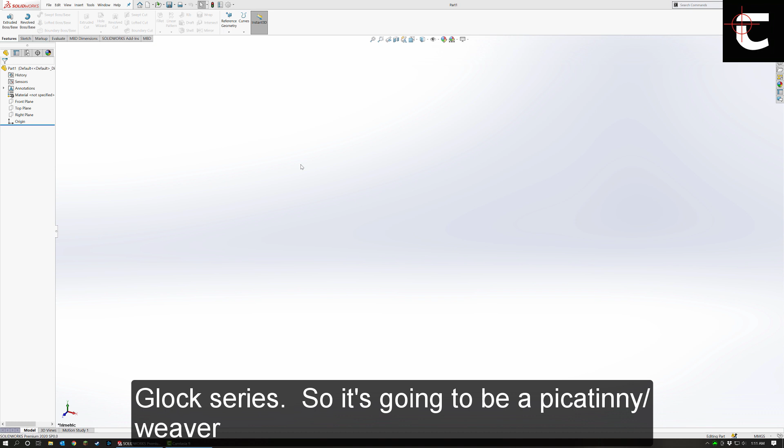Today we're going to be creating an optics mount for the Glock series. It's going to be a Picatinny/Weaver rail mount that goes onto the front of your Glock pistol, and it's going to curve around and put a Picatinny rail up top to allow you to put optics. I actually had a commission to do this for a customer who wanted a sideways racing optic. I designed that, but it didn't work out because the tolerances were not great. So I'm just going to start from scratch and show you the process of doing it.

First thing is we're going to go ahead and define our planes. I of course use SolidWorks, and the first thing I'm going to do is start the female mounting point. So I have a reference, let me pull it up here. I have a reference file for Picatinny and Weaver rails.

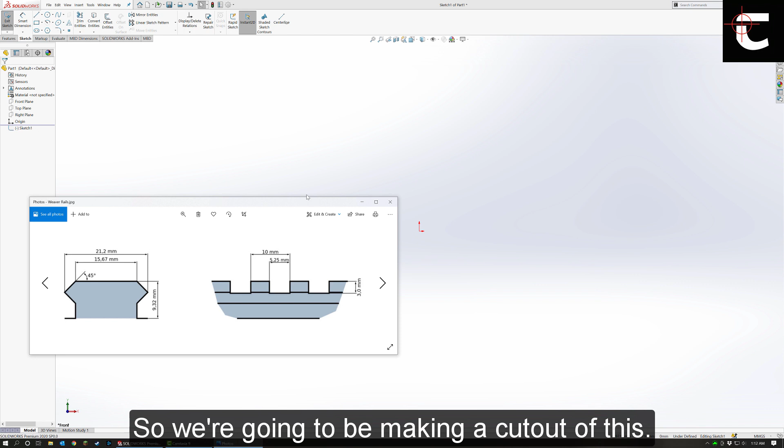We're going to be making a cutout of this that will go onto the bottom of the Glock, and we're going to tolerance it correctly. So I'm going to move this image over to my other monitor where I can get it out of the way. The first thing I'm going to do is create a rectangle to get my frame in the center.

Okay, like so. And female, so I guess first I'll draw a Picatinny rail. It'll look something like this. And of course I am using SolidWorks. Big fan of SolidWorks.

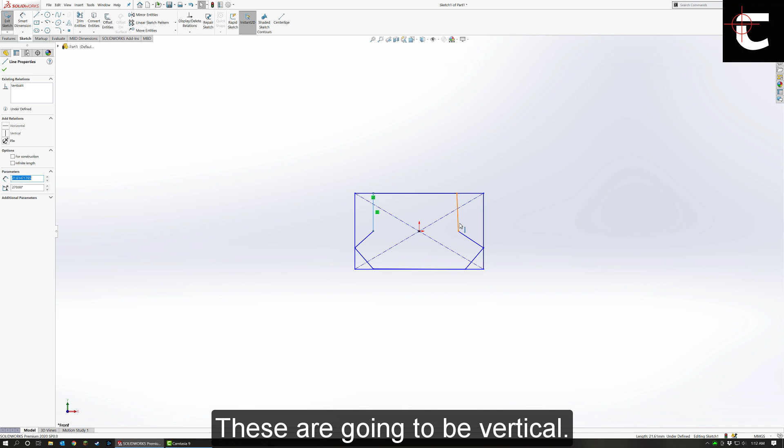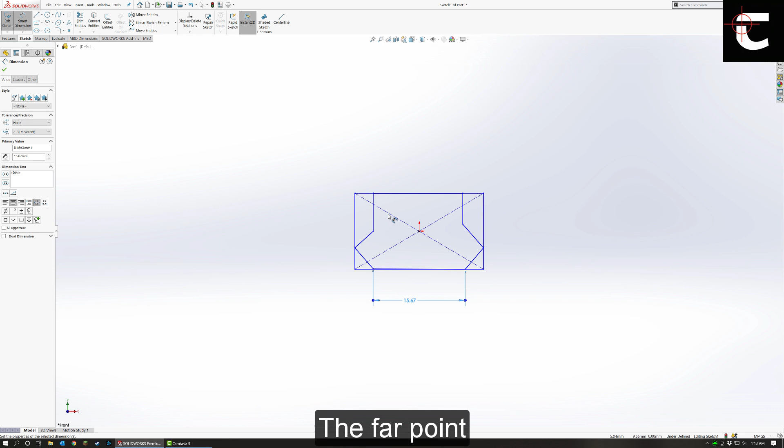These are going to be vertical. These are going to be perpendicular, I believe. Yes, perpendicular. This point to this point is 15.67 millimeters. The far point to the far point is going to be 21.2 millimeters. The height of this is going to be 9.32 millimeters.

Excellent. And this dot here, and this dot here, need to be horizontal to one another. And this needs to be perpendicular. Oop. That's because this and this need to be collinear.

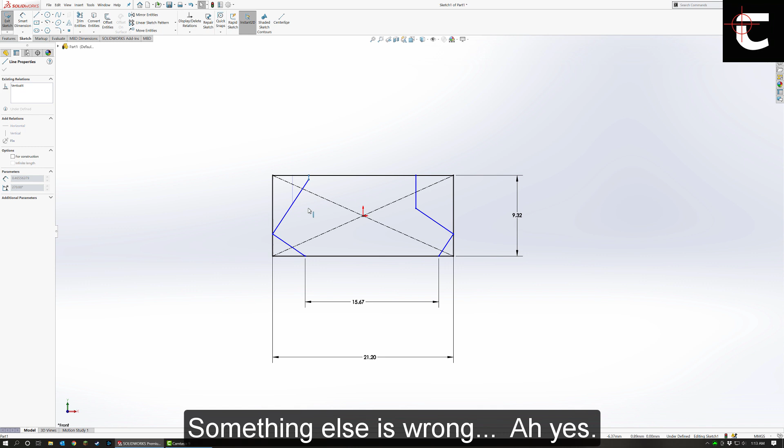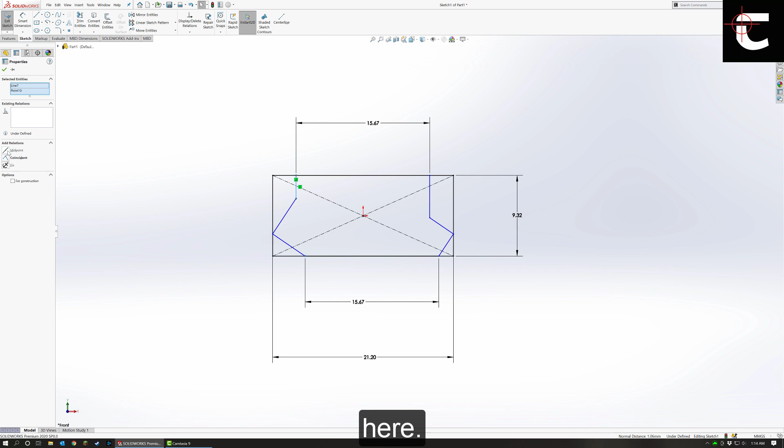Something else is wrong. Yes. This and that. These lines need to be even, and 15.67. And they also need to line up with this dot here, which is, I think, midpoint.

How do I do this here? Okay, this dot and this dot, and make them vertical. Still not right. What do I need to do? Make this and this equal. Make these horizontal. Okay, everything's locked in. There we have our Picatinny rail.

Okay, so our mount is going to be the opposite of this. So I'm going to highlight all of these, and I'm going to say they are for construction. Alright.

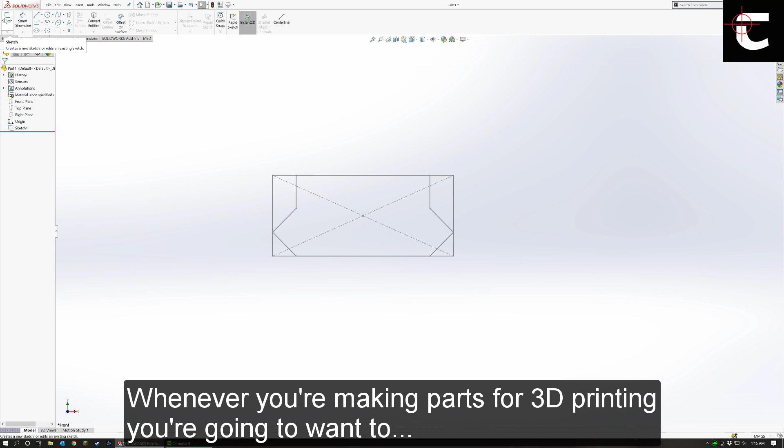So whenever you are making parts for 3D printing, you're going to want to... now, does that look right? Something looks wrong here. I think something is still off. I'm not sure if that's 100% correct. Everything's black, so we'll just run with it.

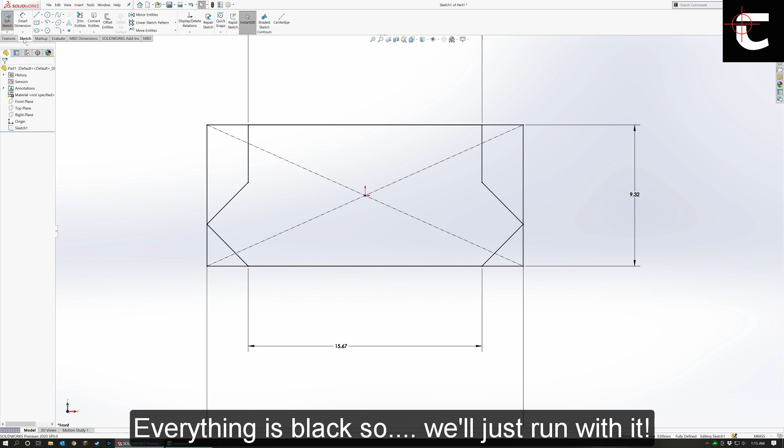Okay, so whenever you're creating parts for 3D printing, what you're going to want to do is give yourself some nice tolerances. So it's going to look like the shape that we have, but it's going to have some space on the outside of it, which will allow it to fit, because if it's the exact same size, it's never going to fit.

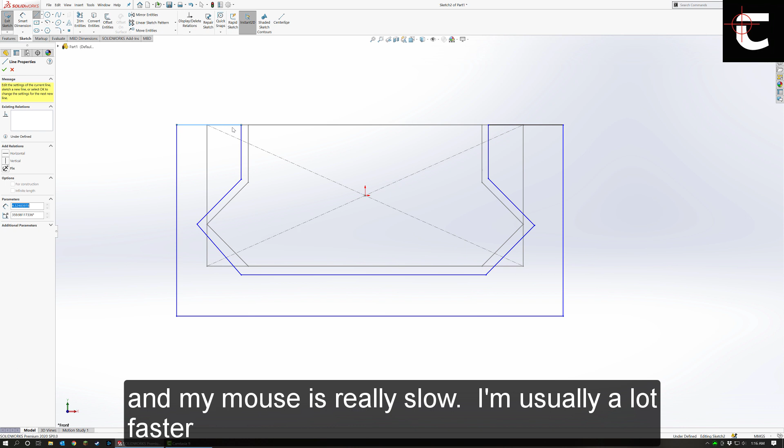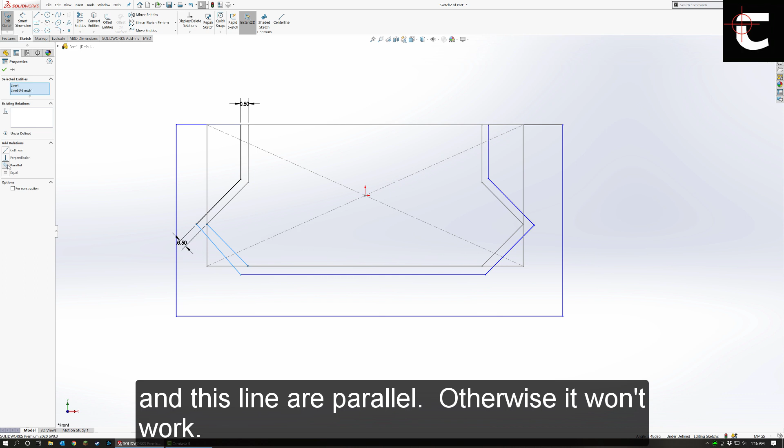So it will look something like... my mouse is really slow. I'm usually a lot faster, but because I'm using this recording software, it's slowing me down quite a bit here. So I'm going to leave a half millimeter space on all the dimensions, and we got to make sure that this line and this line are parallel, otherwise it won't work. And half a millimeter is usually pretty good for a

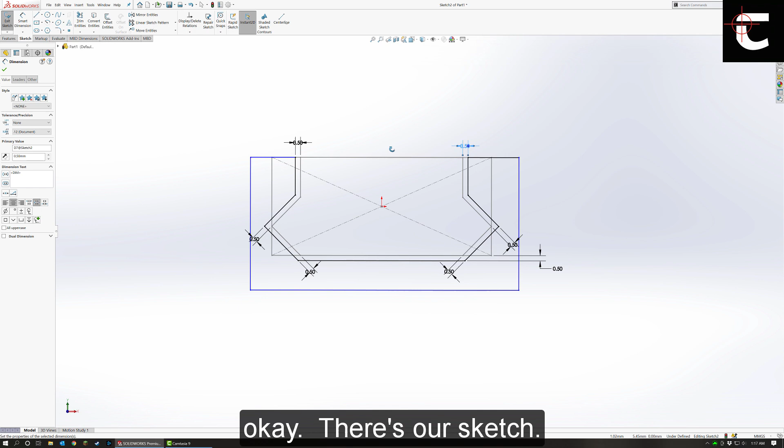nice easy slide-on fit. Picatinny rails need to be tight, but they don't need to be too tight, because you have a pin that you can put in there and screw it together and make it squeeze the Picatinny rail to make it stronger, and we're gonna go over all that. So making sure all our... okay, there's our sketch. Perfect.

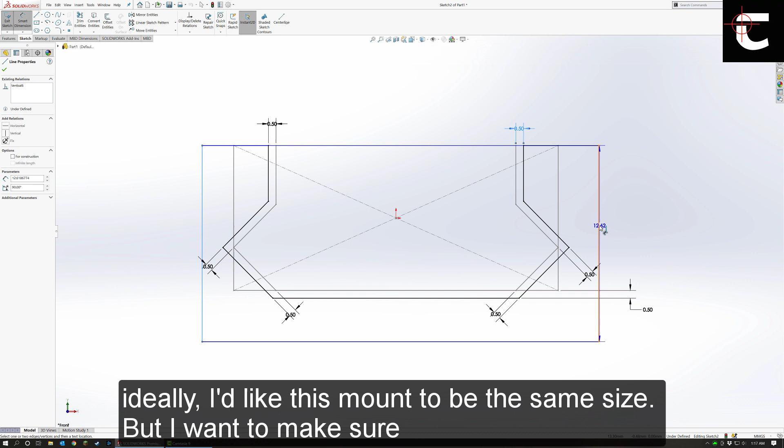Now, how wide do we want it? I have, you can't see it, but in front of me I have my airsoft Glock, and I'm going to be taking some measurements. So my slide is 25.35 millimeters thick, and ideally I'd like this mount to be the same size, but I want to make sure that if I make it 25.35, that we're going to have enough room to make sure the 3D print is strong, because if it's ever too thin, things will break, especially since we're going to be mounting optics on this. We're going to want this really strong. So I'm going to draw a line down the middle here, and that'll allow me to make sure everything's centered.

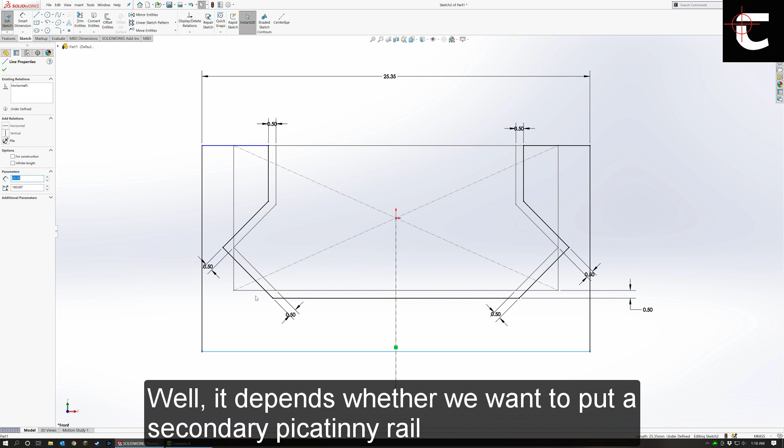Symmetric. Excellent. Now, how far do we want this to go? That is the question. Well, it depends on whether or not we want to put a secondary Picatinny rail for those of you guys that like to run flashlights. And you know what? I think we do, because I think that would be really cool looking. So let's go ahead and give ourselves maybe a good 5 millimeters of clearance, so it's nice and strong.

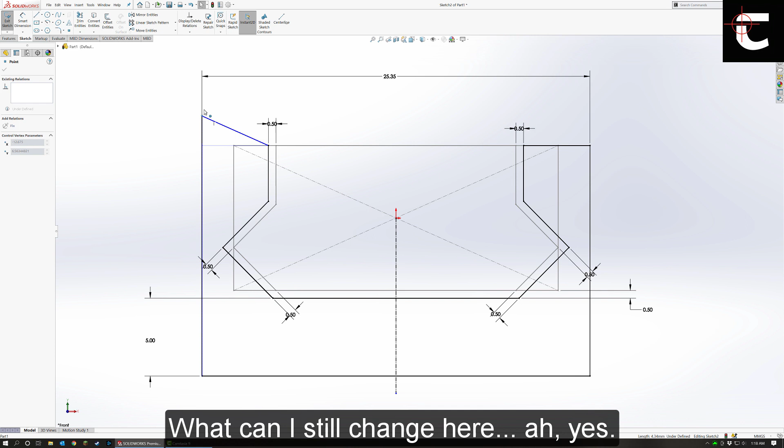This is still blue. Why? What can I still change here? Yes, this line needs to be horizontal. So in SolidWorks, if you have anything that's blue, it just means it's not knocked down, not locked down. It's not necessarily bad. It just means that things are not locked down.

So we're going to go ahead and extrude our boss, and the front of my Glock is, or the rail of my Glock at least, is about 40 millimeters. So I'm going to make this 40 millimeters long. Okay, and that's the little piece that's going to go on the front of your Glock.

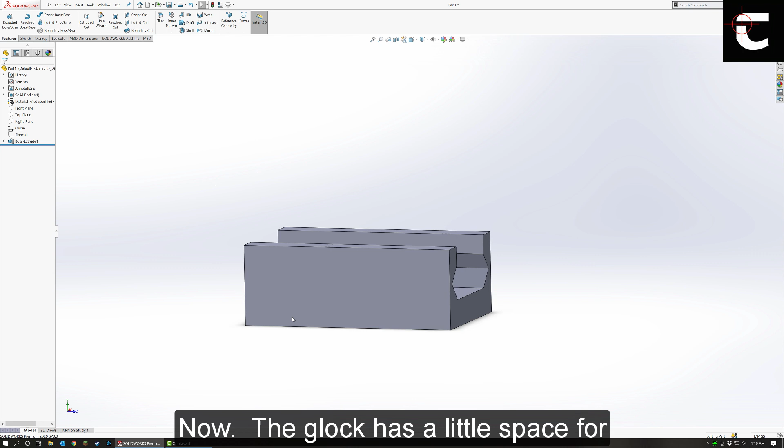Now, the Glock has a little space for a pin, and then that space is going to be about 4 millimeters thick, and it comes in at about 20 millimeters in. So we're going to go ahead and cut that now, just because we have it ready.

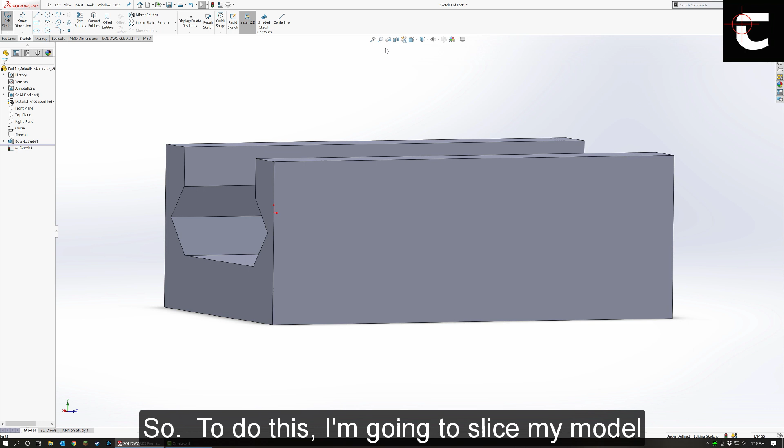So to do this, I'm going to slice my model in half, so I see what's what. I'm going to put it right in the middle of that rail. So I'm going to put it right in the middle of this rail right here.

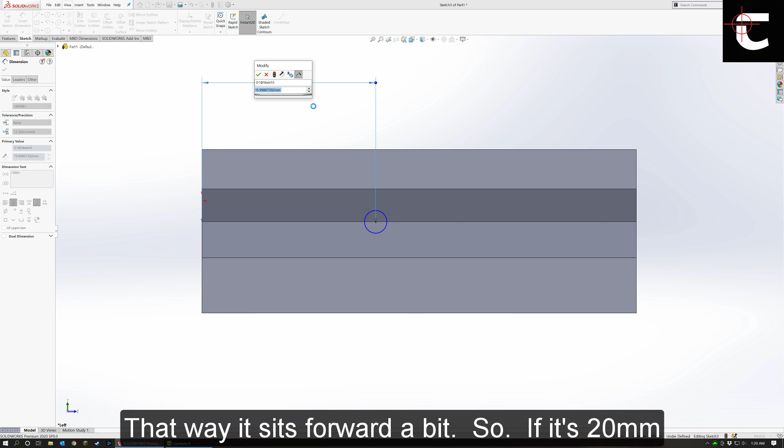I forgot, how long is it? It's about 20 millimeters in. And this doesn't need to be exact, because it'll allow your rail to kind of be adjusted as you do it. Actually, if I make it 15, it'll have to sit lower, so I'm going to want to make it a little larger. That way it sits forward a little bit. So if it's 20, I'm going to make it 22 millimeters.

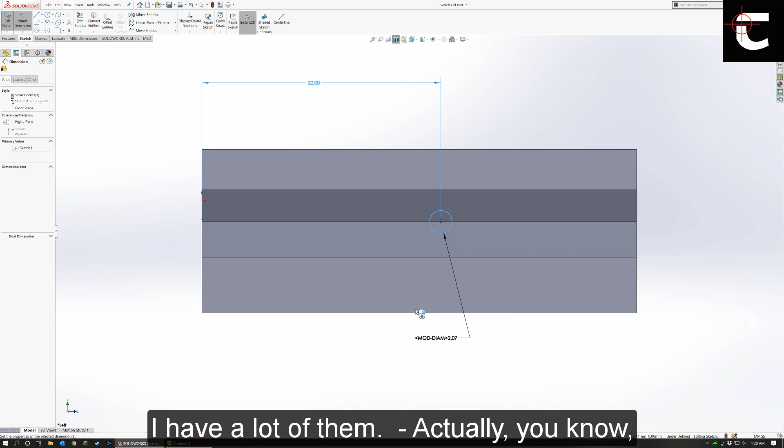And the space is roughly a 4mm hole. Now I like using M2.5 screws simply because I have a lot of them. So, well, you know, I don't know. Actually, let's just go bigger, just for kicks. So if it's got a 4mm hole, I'll cut a 3.5mm hole in my rail, and then you can put a 3.5mm metric screw and nut over there.

So we're going to go ahead and cut this, and then if we take a look at that, that's where our little screw is going to go. I'm going to go ahead and cut down a recess for our screw to sit.

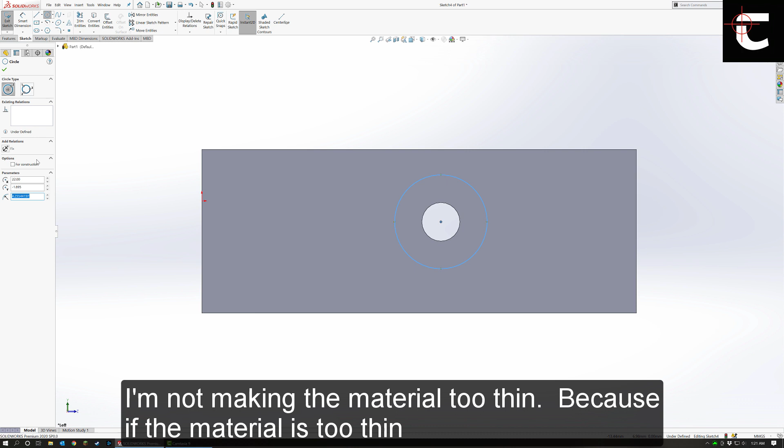Now, I need to make sure that when I cut this recess, that I'm not making the material too thin, because if I make it too thin, this rail is going to break. So we'll make this 6. That should be big enough. And this recess is going to be for the head of the screw to sit in. So if I make it 2mm deep, oof, that's, yeah, we need more meat on our thing.

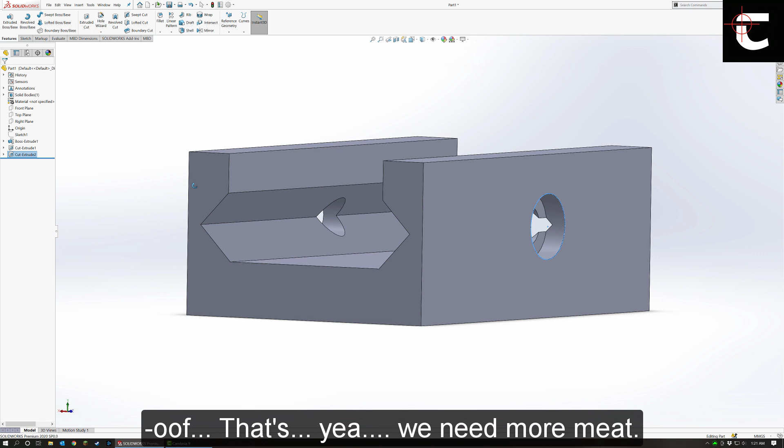So I cut in 2mm and already I'm cutting through the other side. So even though our Glock slide width is this, we're going to have to make it a little thicker. So no matter, go back here, edit the sketch. We can put another, let's say, 2mm on each side. So go from 25 to 27. Let's see how that looks.

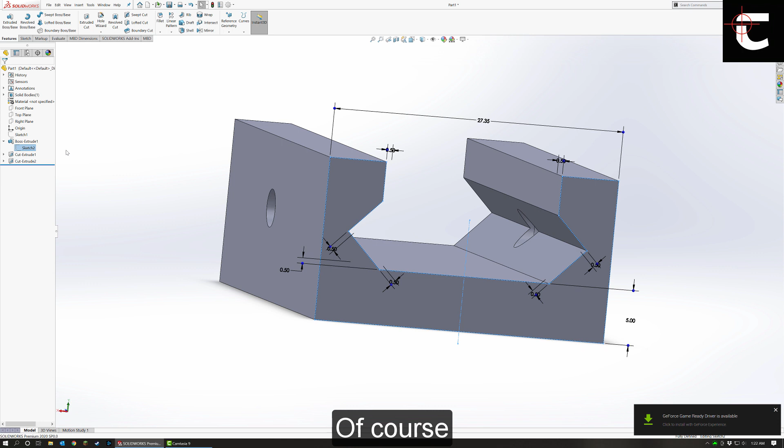Ooh, cutting it close. Cutting it real close. Let's give it a little more meat. Of course, the cool thing with 3D printing is you can always change it and reprint it, but it doesn't cost you very much. All you lose is time.

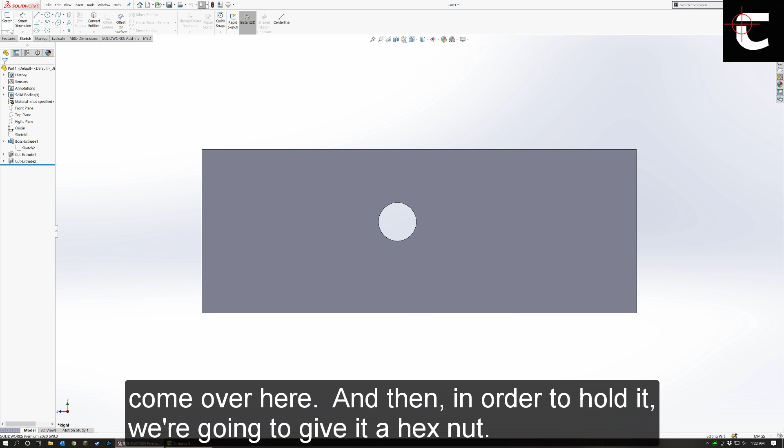But okay, so we got our recess cut on one side. You're going to stick in a 3mm screw on that side. It's going to come out over here, and then in order to hold it, we're going to give it a hex nut. Now, I don't know the dimensions of a 3mm nut, and normally I would look this up, but because I'm doing this on video, I'm just going to cut it first and then go and get dimensions later. But for M3, I'm just going to assume it's 7mm.

I'm going to cut this too deep. Okay, cool. So you're going to stick your little nut in here, you're going to stick a screw through there, and then you're going to tighten it, and it should hopefully be tight.

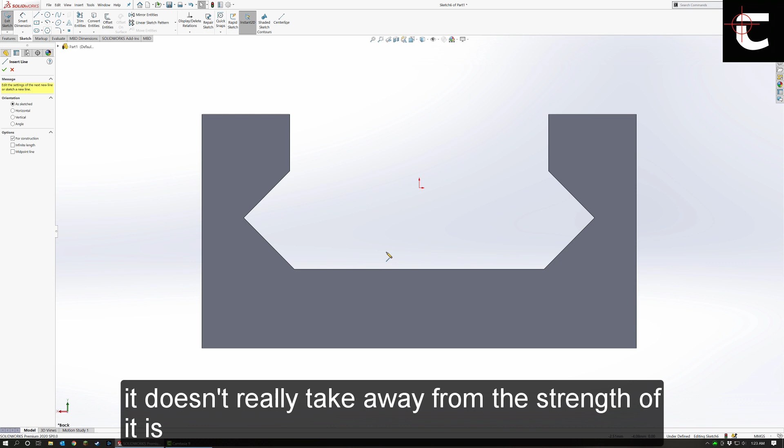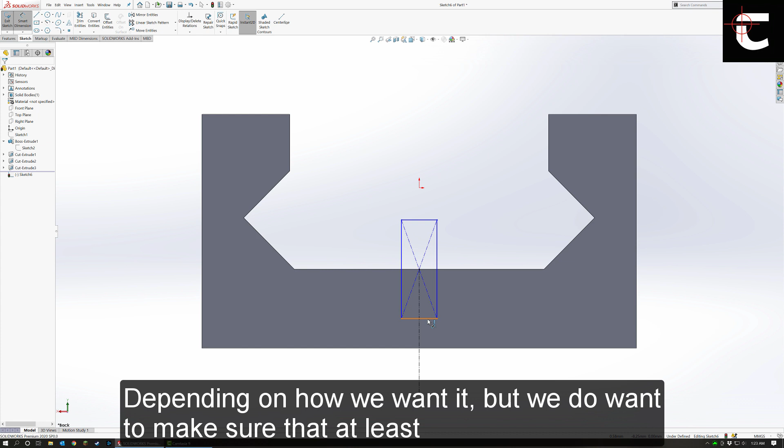Now, a trick I learned is if you've got a solid piece like this, chances are this is not going to get very tight. So what I like to do, and from what I can tell it doesn't really take away from the strength, is cut a little slot in the middle like so. The size can change depending on how we want it, but we want to make sure we've got something nice and meaty - 1mm is not meaty, so 2mm? Yeah, there we go, 2mm is decent. We're going to cut this in the middle, and that way when you stick the screw in and tighten it, this will bend together and make a really nice tight fit.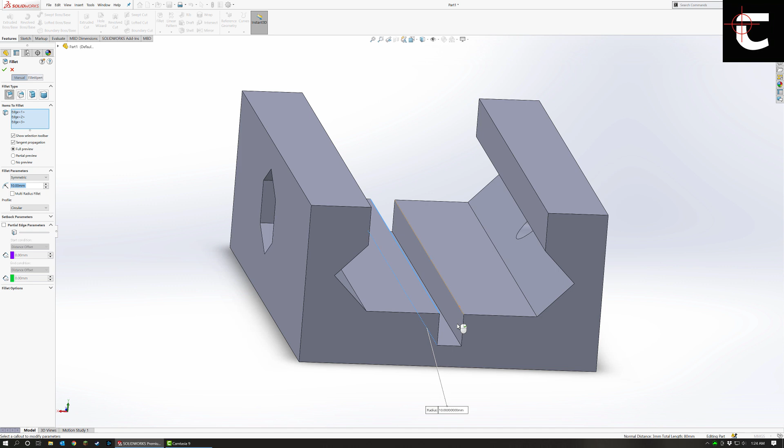So when you have sharp, squarish edges like right here, it makes it very weak and have a potential for breaking. So what I like to do is add some fillets, like so. Of course 10mm is too big, we'll try 2 - 2 is too big. 1mm fillets, there you go.

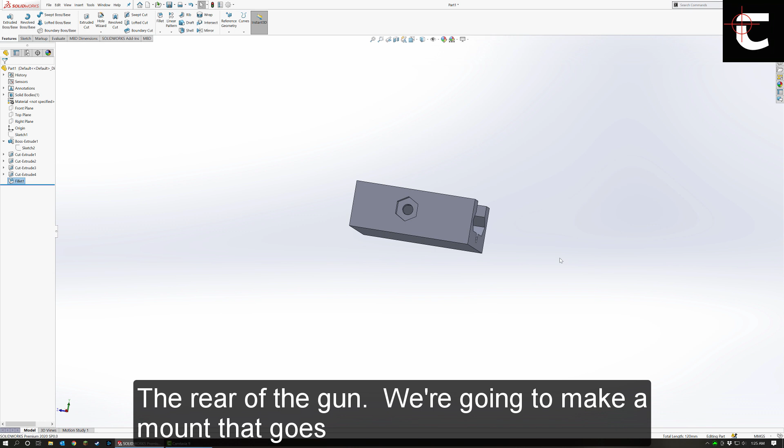That's a nice and simple mount. Okay, so there's the front of the gun, there's the rear of the gun, and we're gonna make a mount that goes up above the Glock and then onto the Picatinny rail. So if I'm holding my Glock here and I'm right-handed, the mount, to not affect my grip, will come out on the side, go above the slide, and then add a Picatinny rail.

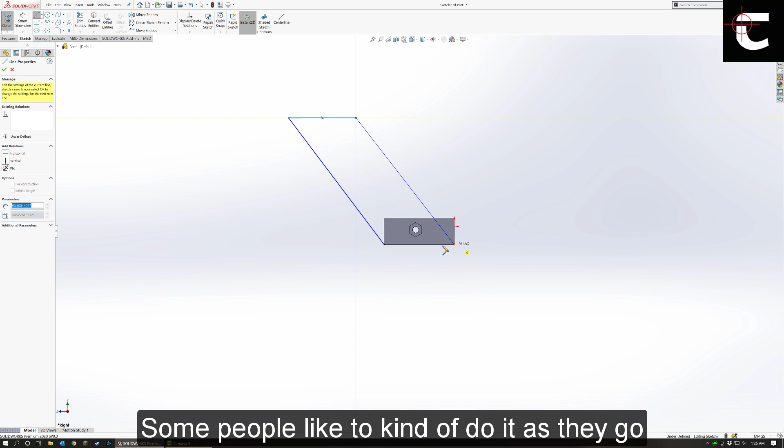So we'll start with something very simple, just like this. And what I like to do, for me anyways, is when I CAD things, I like to keep things as simple as possible first, and then make it pretty later. Some people like to kind of do it as they go, but I like to worry about that stuff afterwards.

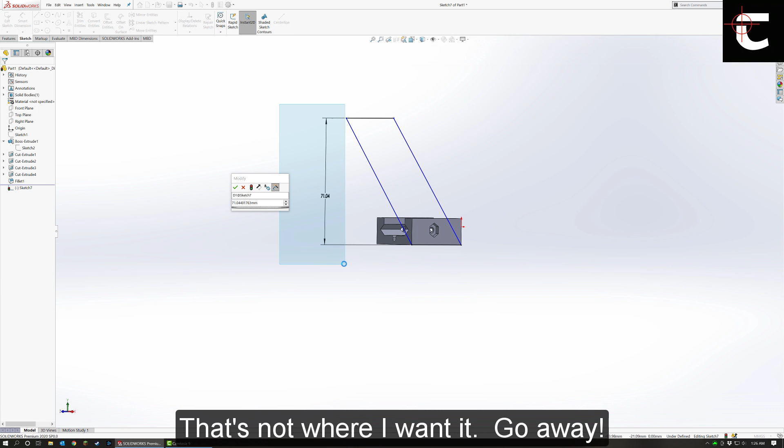So from the bottom of my mount - actually that measurement is not where I want it. Go away. Wow, the computer is very slow with this being recorded. There we go. So, from the middle of my rail to the top of my slide is roughly 34 millimeters.

35 millimeters. Oh no, I have sights too. So to the top of my sights, I have 38 millimeters. So if I make this 40 millimeters from the side of the rail, that should be plenty of room.

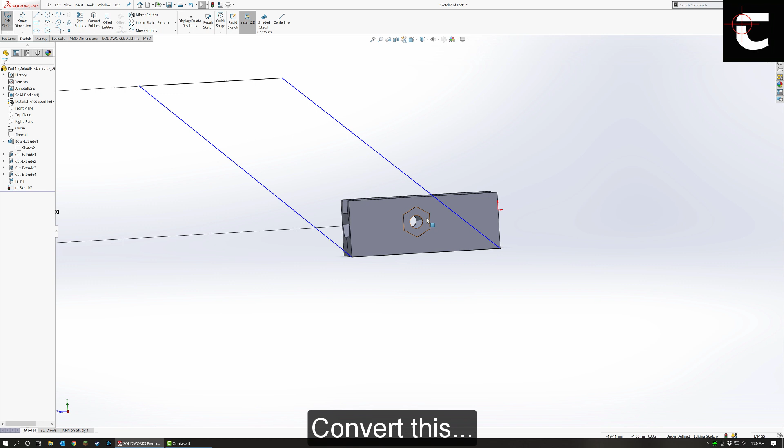So if I make it 40, like so, and I'm going to go ahead and convert this hexagon - will it let me? No, it won't let me. Okay, that's fine, I'll just draw it again. No big deal. Draw this hexagon again. Come on.

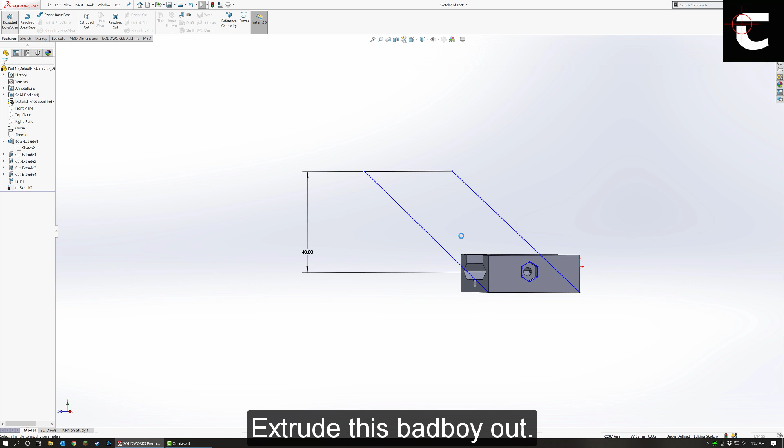Alright, what we're going to do is extrude this bad boy out. And for this mount, which is going to be carrying a heavy optic, you're going to want something pretty thick. Now, my only fear is that this will affect your grip.

Right, I'm holding the Glock like this - you can't see this, but I'm actually holding my airsoft Glock in my hand right now. That should be okay, actually it should be okay. Well, we'll find out. Okay, so this is at this edge right here. We've now cleared the slide, which means we could probably start on our optic.

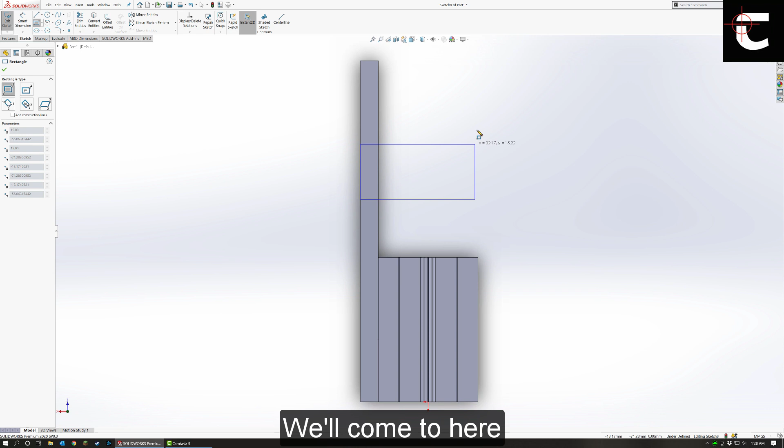So it'll come to here. Right, good. And then we're going to want this 5 high, that should be plenty. Right, and I realize it's ugly, but that's okay, because we can make it pretty later. Function is the most important thing right now.

Run this out - I'm going to give it a nice long Picatinny rail. So from the front of this to the back of my Glock is roughly 130 millimeters. So as long as I make it, I don't know, let's just say 100 millimeters, that should be plenty.

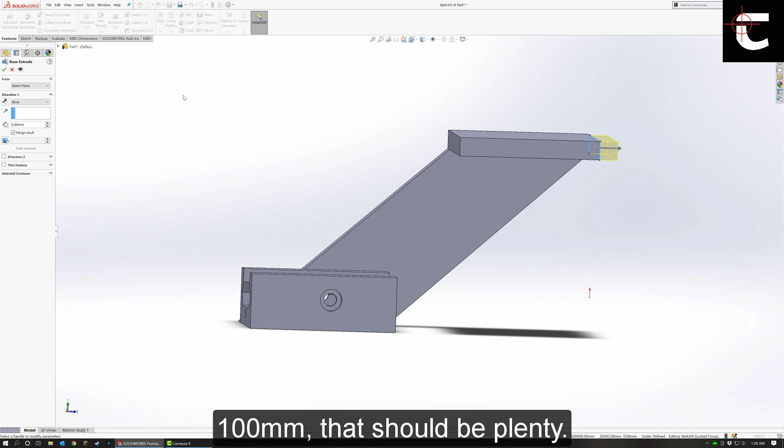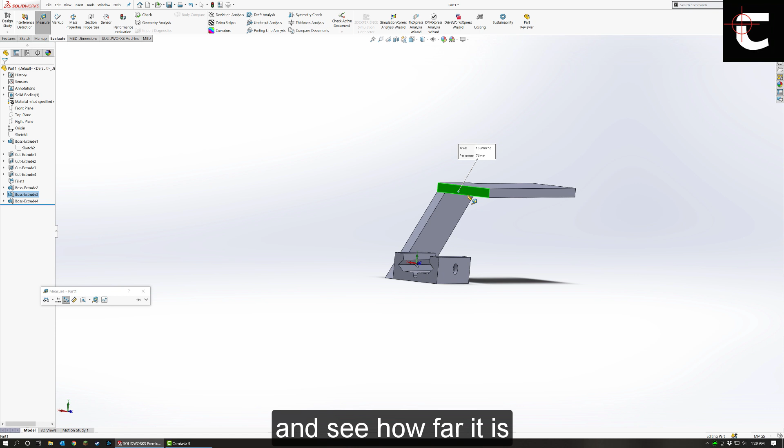And I don't know how long this is, so we're going to make this just 90. No, that's probably too long, let's make it 100. Let's go up and measure and see how far it is. 108 - perfect, that's actually good.

So, obviously this little flat bar thing looks pretty damn ugly, but first thing I'm going to do, as I said before, is craft my structure first and make it pretty afterwards. So we're going to go ahead and put in our Picatinny rail right now.

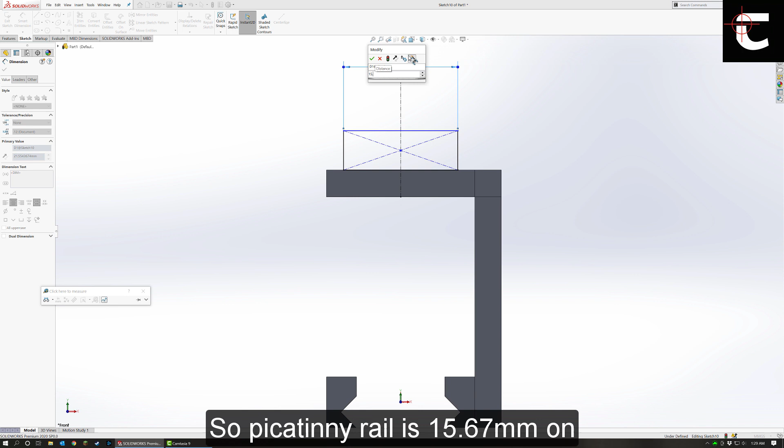This one, because it's going to actually be the Picatinny rail, we're going to do that to exact specifications. So Picatinny rail is 15.67 millimeters on the inner.

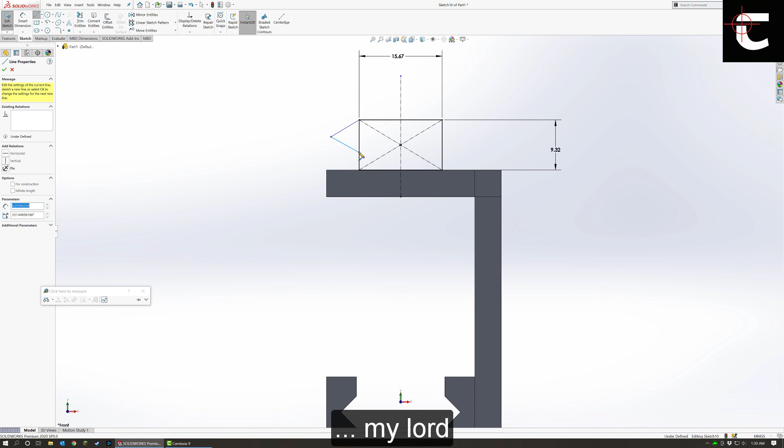It is a total of 9.32 millimeters high, the teeth. Oop, I missed, the teeth. My lord, that's ugly.

Let's go ahead and mirror that by this axis here. Okay, the teeth length is 21.2.

These are perpendicular. And you're still not. Why? What did I do wrong? Ah, they must be equal. This and this must be equal.

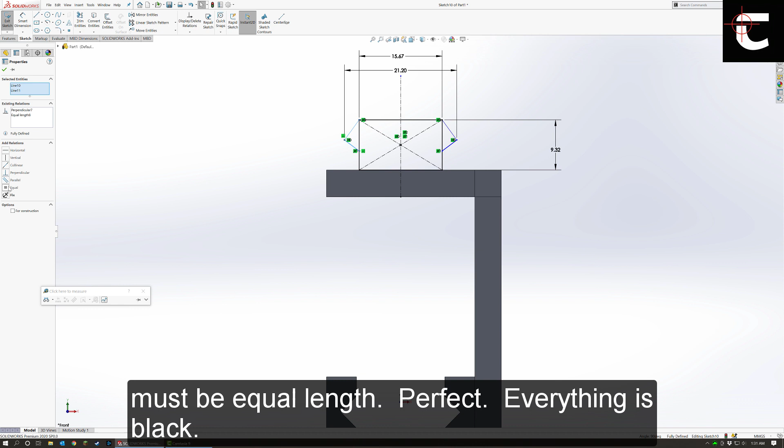Perfect, everything's black, perfect. Okay, I'm going to extrude this boss. It wants me to select contours, so I'll go ahead and select contours from there. We'll go up to a surface, up to this surface here.

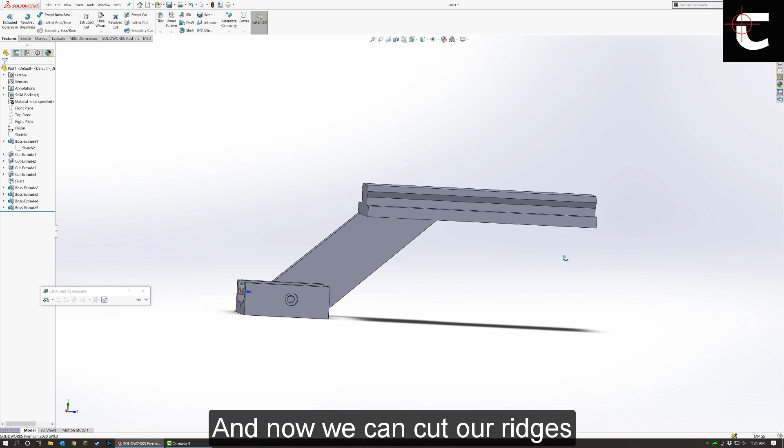And now we cut our ridges. So Picatinny rail ridges are 5.25 millimeters wide, and they are 3 millimeters deep.

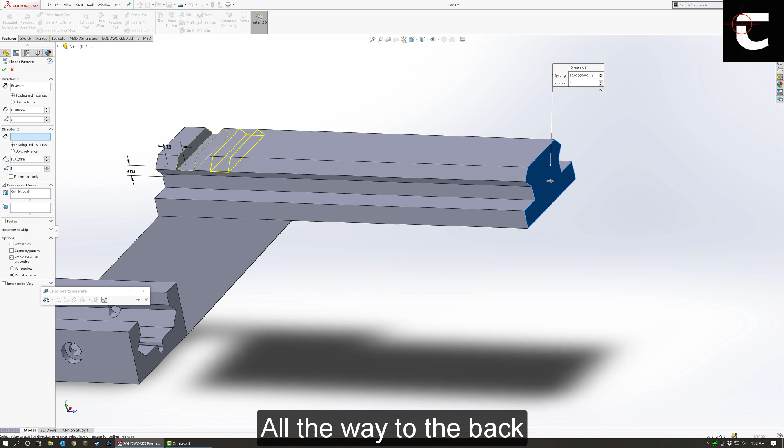I'm going to cut that through everything. Boom, our first ridge. I'm going to take this linear pattern all the way to the back, as many times as you can, more times than that, and they are 10 millimeters apart. Perfect, and there's our Picatinny rail.

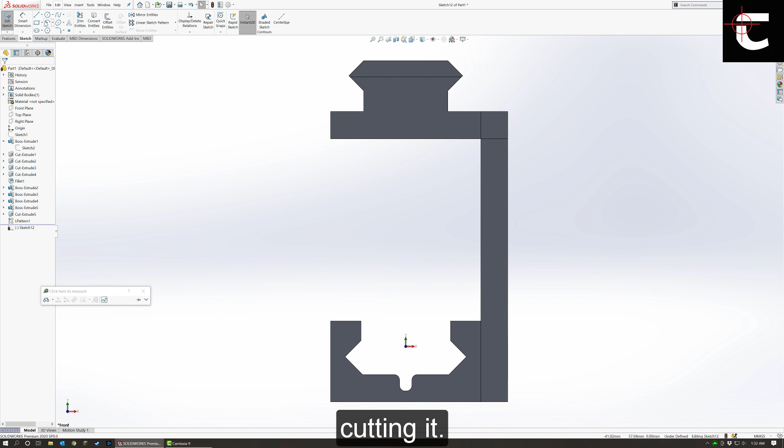Okay, so there's no real need to have this here, so I'm going to shave that off. And I'm going to do that by cutting it. So cut this here, and then cut this here. So one of the things that I've learned, actually let's cut it all the way here.

One of the things that I've learned CADing stuff for Airsoft is that a lot of times what I originally did was I would actually go back and change the values of this boss. When I first extruded this rectangular boss, I would go back and change the values.

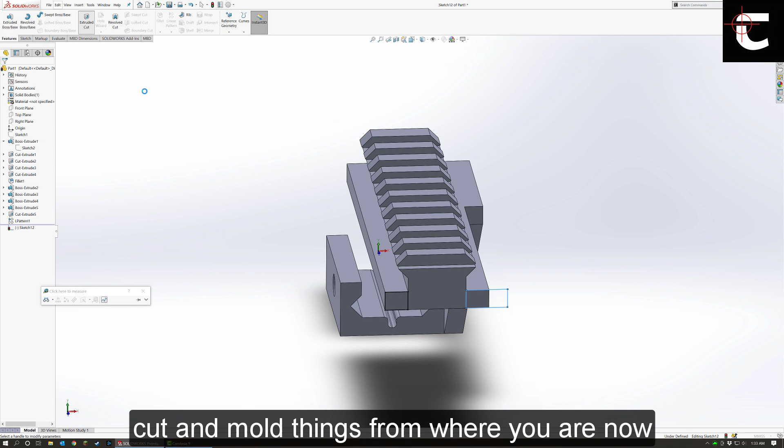And that would mess things up because I've already made this Picatinny rail on top of it. And what would actually happen is that Picatinny rail would screw up and I'd have to go back and fix that. In my experience, it's much easier to just cut and mold things from where you are now, and if you need to change them, you can just do another cut, etc., because then it'll keep track of your progress, which is very important.

Did I get my height correctly? Can I do this? 9.32. Yes, I did. Okay, perfect.

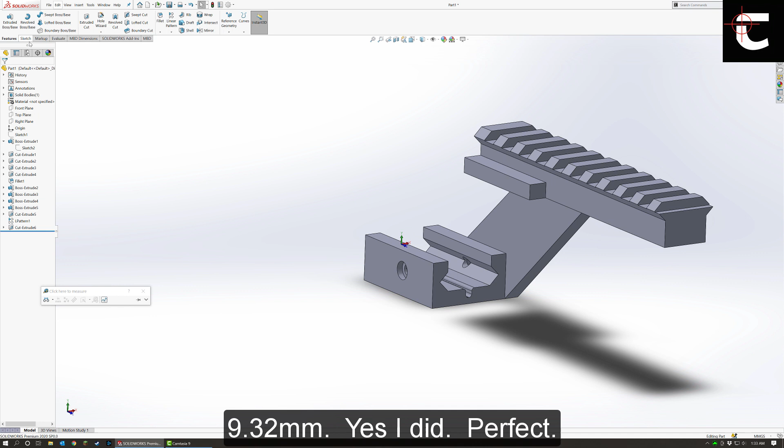So yeah, instead of making this thinner from when I extruded it the first time, it's much easier for me to just go ahead and recut it and clean it up that way. That way I have a log of everything I've done, and I can kind of go back and move this blue bar up, and it'll show me what step I have.

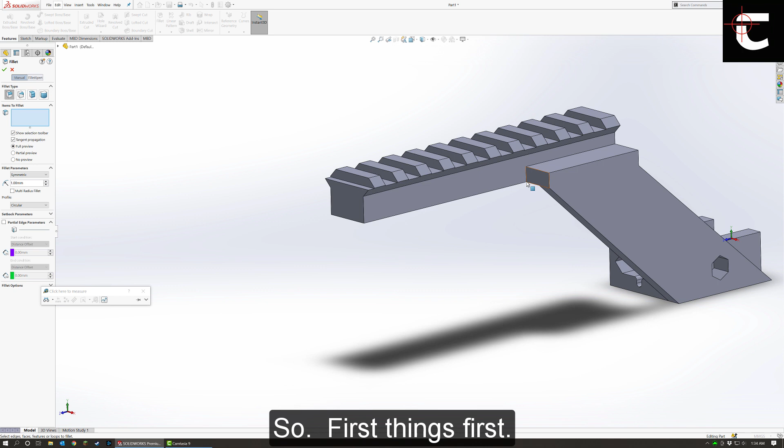See? So instead of making this shorter at this step, which then screws up all the other steps, I just go ahead and introduce the cuts I need. Okay, that's a very simple mount. Now all we have to do is clean it up a little bit and make it look cool. And that'll be that. So, first things first, give us some fillets for strength.

Now, I don't like how this ends on a cut. I actually want it to end on a boss, and I'm going to do exactly what I told you I don't do, but that's okay because I know what I'm doing. I think it's this boss.

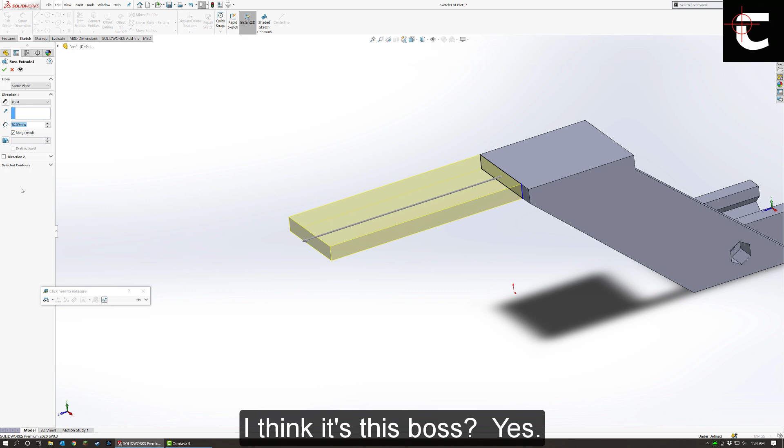Yes, instead of going up 70, I'm going up 90. Will that change? No, too much. Actually, it does every 10 millimeters, so you're going to not want to do in terms of 10. Let's try 5 millimeters. A little bit more.

How about 7 millimeters? Oops, 77 millimeters. Okay, cool, that looks a lot better.

Alright, perfect. Now, I want to add a fillet in here, but I'm scared that this fillet is going to rub on the side of my slide. And I'm scared I didn't make this tall enough.

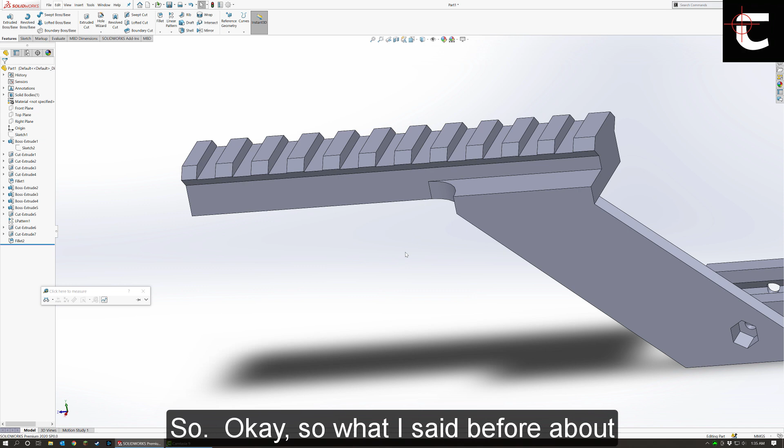So, okay, so what I said before about going in and cutting it from where it is, you do that if you can. Now, obviously, if I want to raise this thing, I can't easily add material here because if I add a boss here, it's going to keep everything else where it is. So in this case, I have to go back and change it. But if I could, I would just continue from where I left off.

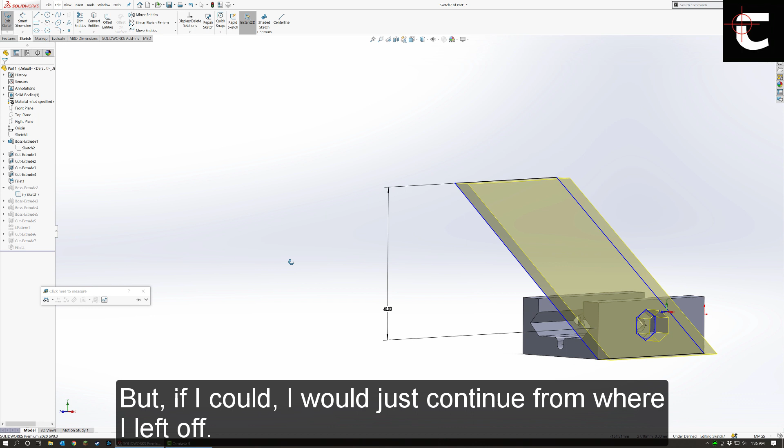So we're going to give it another maybe 44, 48, 43 millimeters of clearance, and that'll let me get a 5mm fillet in, I hope. We'll find out.

Five millimeter fillet. Okay, cool. Let's go ahead and fillet this edge, which does not need to be sharp. Let's go ahead and fillet this edge.

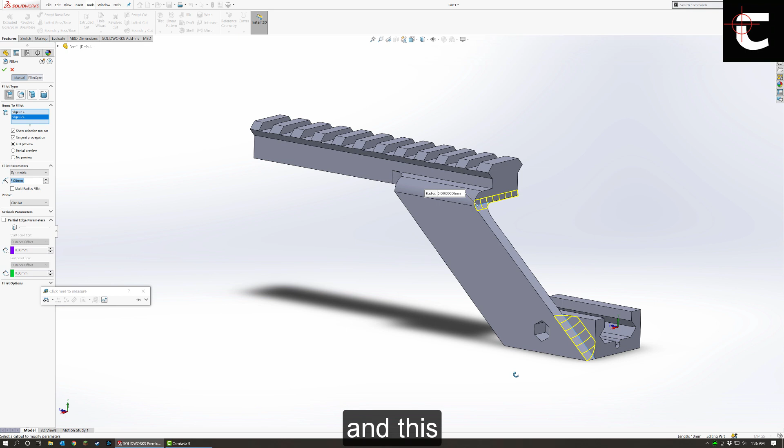While we're at it, go ahead and fillet this, and this, and this in here. And these I can make a bit bigger, I think. Let's try 10mm. Ooh, too big. Oh, maybe.

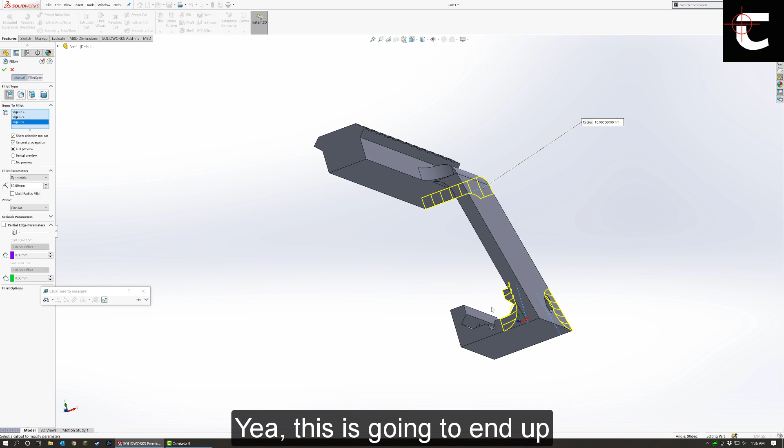Yeah, this is gonna end up hitting the back of my gun, and that's gonna be what ends up stopping it. So that is too big. We'll go with 7.

Okay, there you go. Very simple mount. I'd usually engrave something in. You know what? Let's just do it.

Why not? Since I have you all here, I'm gonna engrave my company in here because that's what I like to do. Just so that there's no mistake whose video you're watching. CronoArm Customs.

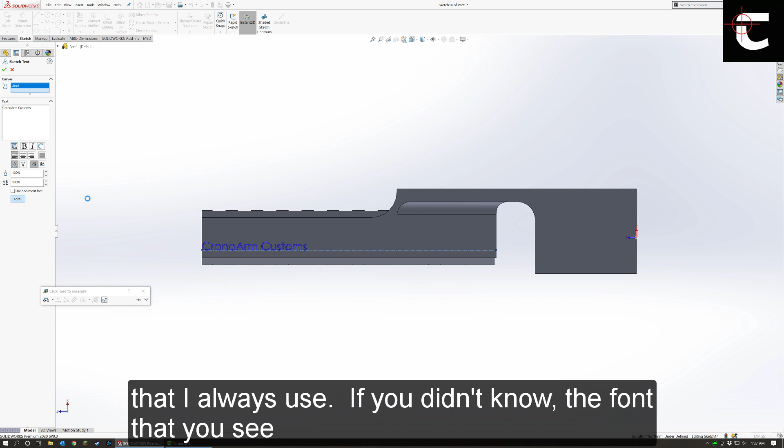I want to use the font that I always use. If you didn't know, the font that you see in all my videos is actually Impact.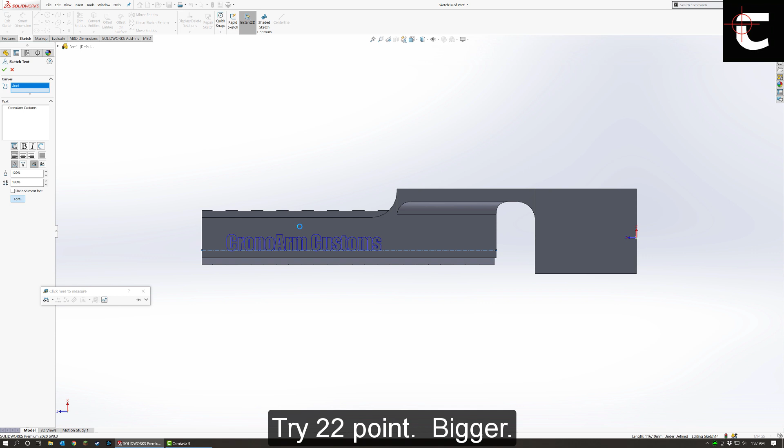And we want this spaced out a little bit. We're going to want it a lot bigger than that. Let's try 22 point. Oh, we can get way bigger than that. Let's try 28 point. A little bigger. 36. Oof, pushing it. Oh, let's just try it.

Take this, engrave it in, make it 2mm deep. There you go. CronoArm Customs. CronoArm. I forgot an S.

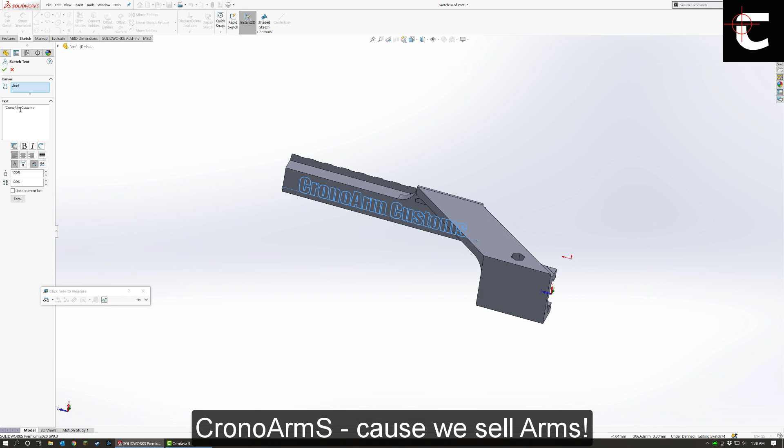CronoArms. Because we sell arms, not arm. Toy arms. People will ask what I do. I say I sell toy guns.

Okay. There you have it. Glock mounts. Very nice and simple. I'll throw this on the printer and I'll let you know what comes out. Thanks for watching.

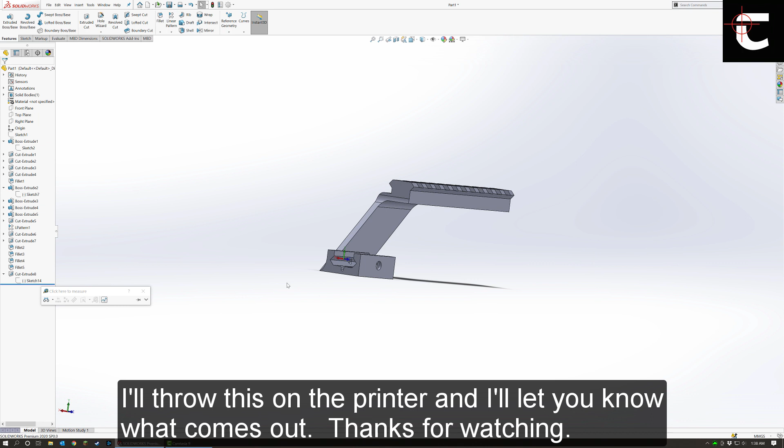Haha! I'm not done yet. I lied to you. Mostly because we were supposed to add a bottom Picatinny rail here, and we never did that. So let's go ahead and do that. And when we add the Picatinny rail, it'll allow us to cut this deeper and still maintain strength.

So let me bring up my reference. Draw a center line down the middle. Wait, I was going to use this as a reference, but I forgot. This is toleranced differently. So let's not use that as a reference. Good thing I remembered.

Same thing we've been doing. Oop, this needs to line up with this.

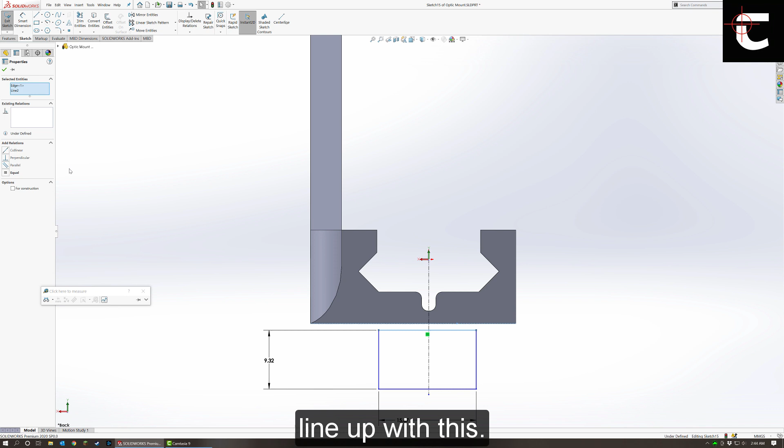It's currently 3 a.m. in Arizona. I'm doing this for you guys. So I don't sleep very much. In case you're wondering, I work a job on top of this, so, and I am working tomorrow.

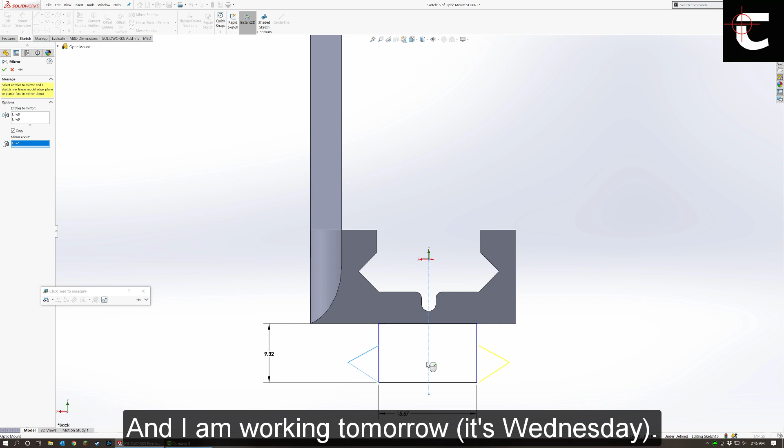I come home from... oh, look at that, it's not even. Why? Why? Because this and this are not symmetrical. Make this symmetrical. Perfect. This, let's go over here. This and this to equal and perpendicular.

And then this to this is 21.2 millimeters. Perfect. Yeah, so I wake up and I work, and then I go to work, and then

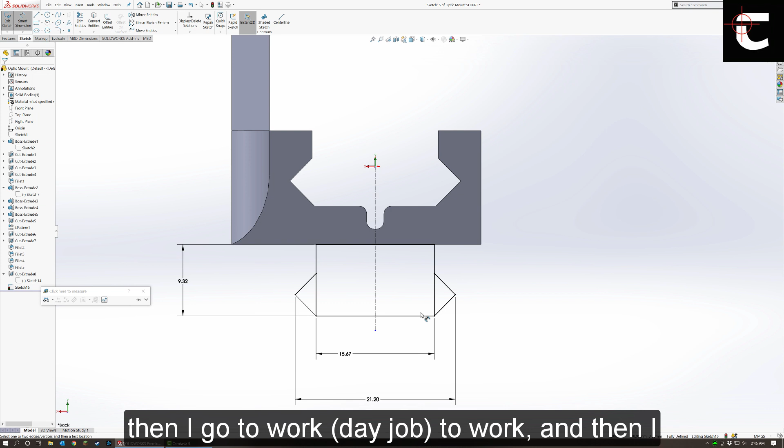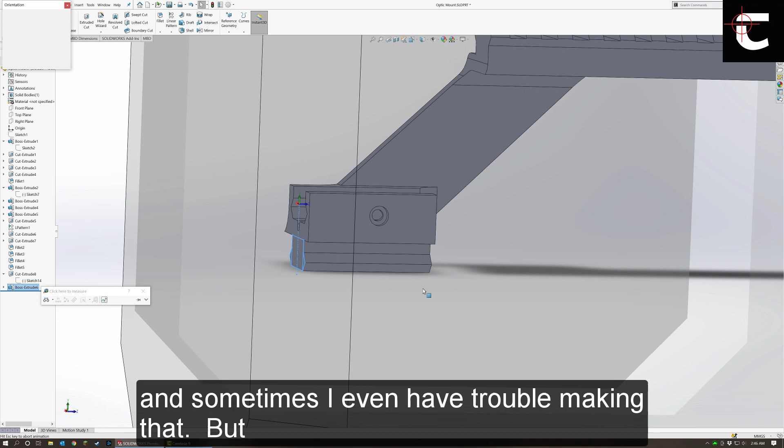I come home from work, and then proceed to do CronoArms. So, but I'm getting help soon, and I hope to get a lot of these orders out a lot faster. I know I quote a 30-day lead time on my website, and sometimes I even have trouble making that, but again, I'm getting help very soon, so hopefully you guys don't have to wait on me as long as you have to.

Because who likes to wait, right? You buy something, you wanna see it as soon as possible. That's the whole allure of like Amazon Prime.

Actually, let me give it a bit more meat on the front here to do that.

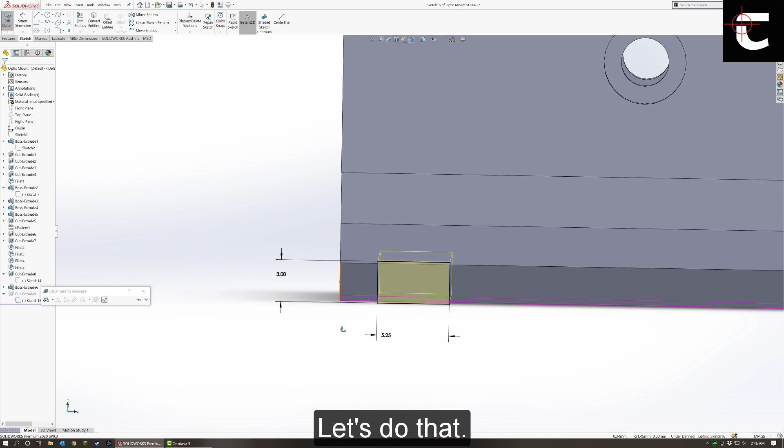Four points in the front. This, because that makes 10. Perfect.

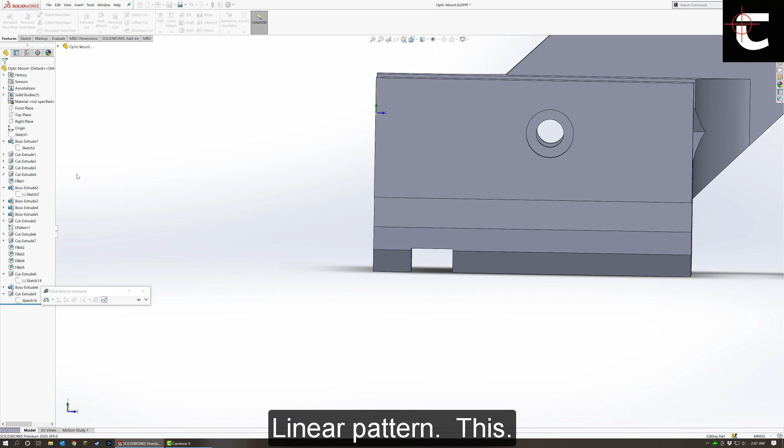Alright, now we can throw this on the printer. Actually no, I lie again.

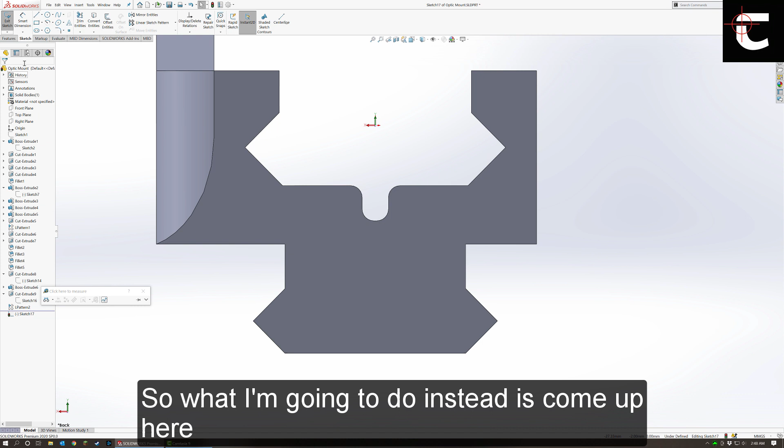Let's make this cut a little deeper. Now I can actually do what I preach, and say that, instead of going back and changing this, because you wouldn't be able to, because SolidWorks is a chronological thing. So if I went back and I tried to cut it, it'd cut through this and then it would mess this up. So what I'm going to do instead is I'm just going to come up here,

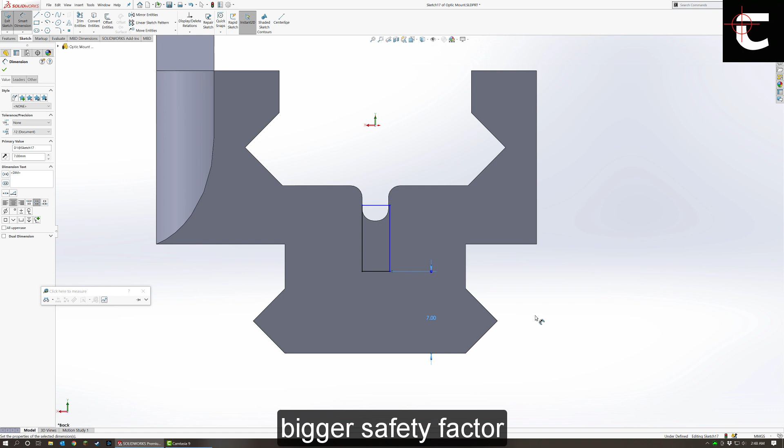go up here, here. And now that I have all this meat down here, I can give myself a much bigger safety factor, because all this meat will hold on together. Oh, that's interesting. I missed.

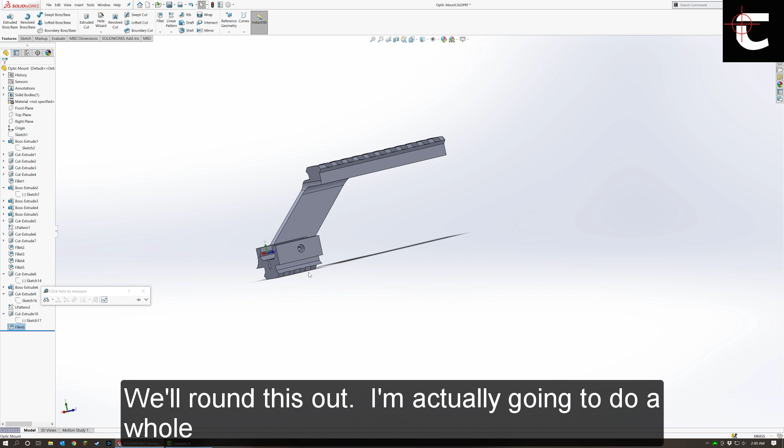Okay, perfect. We will run with that, and yeah, I understand it's probably going to be sharp here. We'll round this out. I'm actually going to do a whole Glock, either a carbine kit or a whole front suppressor kit, and I'll add like a rail up here for you to put barrel attachments, but that'll come another day. For now, I just want to make sure that what I designed here fits, it's sturdy, it works. Okay, thanks for watching.